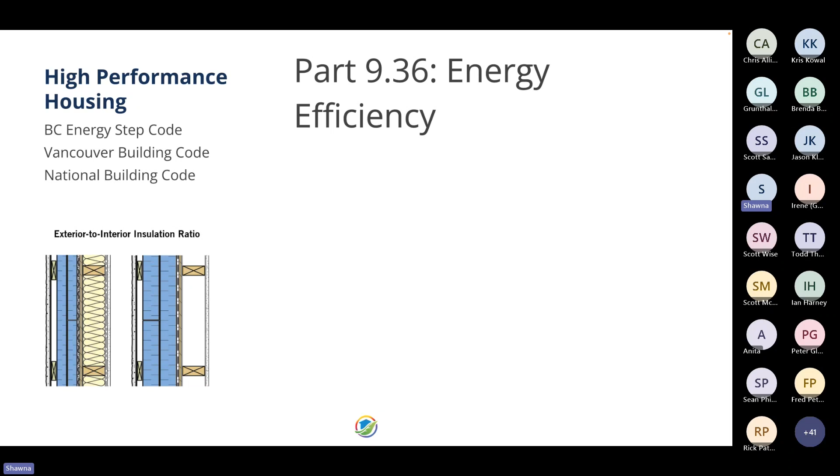Coming up in the 2025 code are retrofits. This means Part 10, alterations to existing buildings, is focusing on energy conservation for retrofits. So this is huge for all of those builders or contractors that you have not seen focus on high performance. They're now going to have to actually work within that realm, and it's going to be new to them. So why do we care so much? How does it affect you?

Because we're moving into places where building science is the key. Part 9.36, everything to do with energy efficiency and energy conservation, is based in building science. Building science looks at the house as a system, how all of the parts of the house or the building interact with each other: the envelope, the occupants, the outside environment, mechanicals. It's all connected. It's all dynamic because we have moisture changing, we have temperature changes, we have wind.

We want to make sure that we can control all of those things so that the house is comfortable and reduces energy use for the occupants. And then bonus points, when we reduce energy, we also typically reduce carbon loading, so we're doing something for the environment as well. So the key primary factors for building science are based on controlling airflows, heat transfer, and moisture flows.

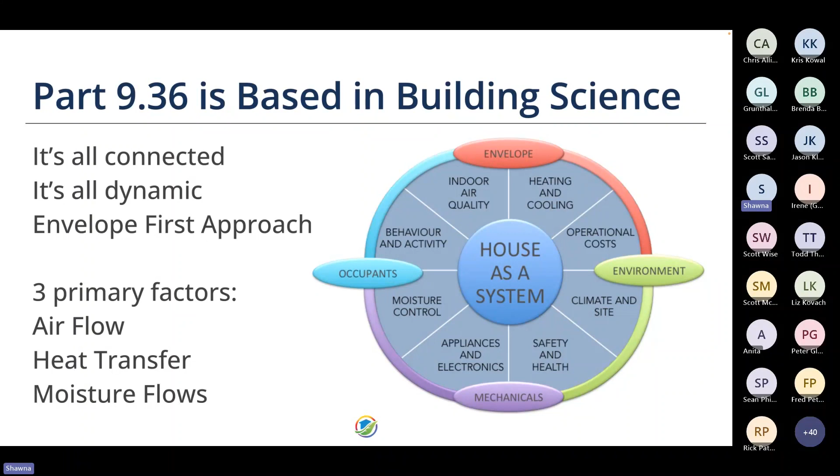When you get into these high performance buildings, the key to them, because it's the most complex piece, is a high performance wall. Now, everything else has requirements within the building code for insulation levels, for air tightness, for the different control layers, but the walls are the places where there's the most variation. So typically we see this kind of a wall, which is a double stud wall.

It could be 2x4 stud walls built one inside the other, with one of them being the bearing wall, or they could be a 2x6 on the outside as a bearing wall and a 2x4 on the inside. They can be connected by one plate, like a 2x8 or 2x4 sill plate. They could have separate sill plates. They can even be manufactured like floor joists. They can be floor joists that are actually stood up in a vertical position as well.

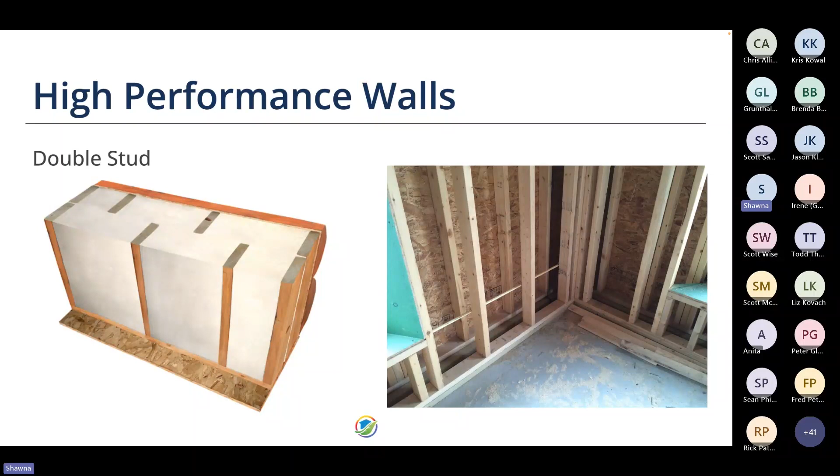There's a lot of variations in this one in terms of how builders like to do the assembly. Mainly, they like to do this one because there's no special training and no special materials. You don't have to do a lot more than put up two walls, one inside the other. So crews can stand them up pretty quickly. The other wall, and you'll see this a lot as well, is a split insulation wall where you have rigid or semi-rigid insulation on the exterior of the sheathing.

And you have typically a very inexpensive batt insulation to the interior in the stud cavity. And these vary widely. You can have rock wool, fiberglass, blown cellulose on the interior. You could have semi-rigid mineral wool on the exterior. You could have a type 1, type 2, or type 4 insulation, polyisocyanurate, or an insulated sheathing product. Wide range here too.

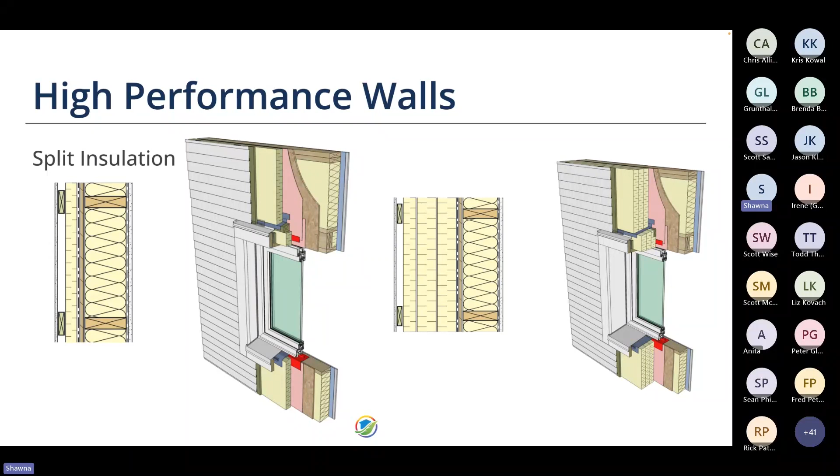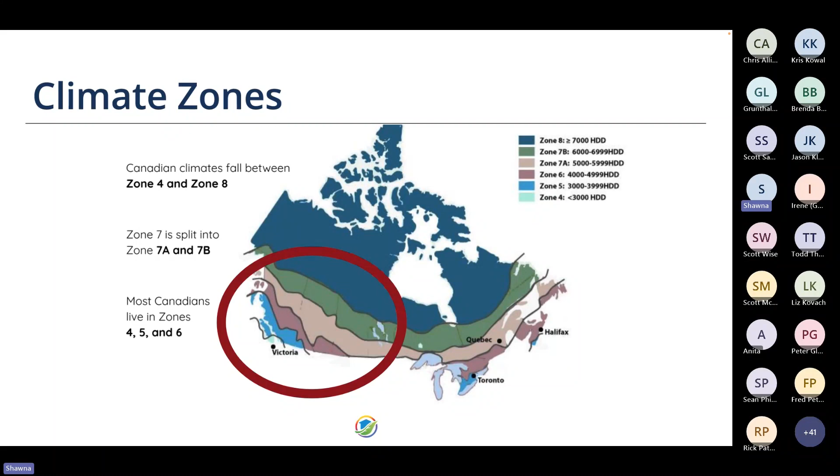What we also need to know, once you get past all the different pieces and bits of the high performance walls, is what suits which climate zone. So most Canadians live in zones 4, 5, and 6. When you're in Western Canada, if you're in BC, you could be in the range of between 4 and 8. But once you move past that first border, you're moving into colder mid-continent climate zones. So by the time you hit Saskatchewan and Manitoba, now you're actually in zone 7A, 7B, and 8. And those are very different approaches because of the extreme temperatures.

Now, most of the population lives in 4, 5, and 6, and the bottom part of 7A. There's a broad swath of housing that we can work with, and some really solid building science right across the country has been brought into place. The top part of 7A, and then 7B and 8, we really need to focus on more detailing and take a different approach to the products that we're using for insulation.

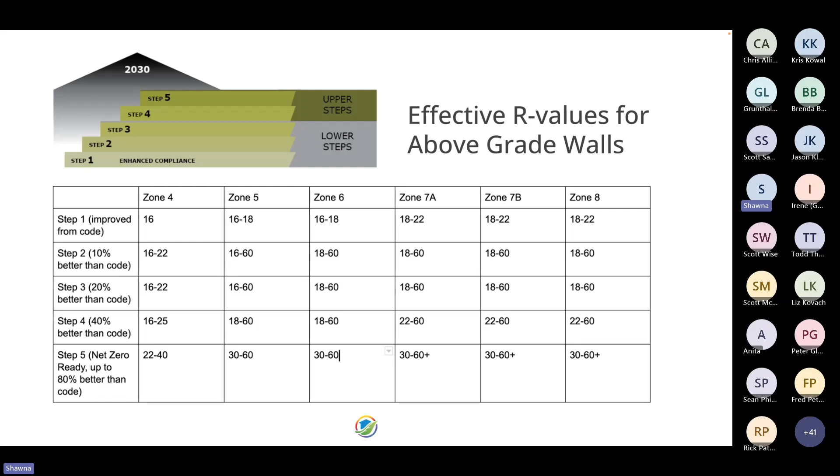So here's a quick little chart showing you the effective R values for above grade walls as per the BC Building Code, which is reflected in the National Tiered Code. So they've been harmonized with an agreement that went right across the provinces, I think 2022. Anyway, that's irrelevant for this. But you can see that there's quite a range of effective R values for above grade walls as you move through not only the climate zones, but as you move from step 1, which is slightly improved from the 2010 code, through step 2, 3, 4, and 5. So how you deal with these ranges of climate zone and which part of the step code or the tiered code you're working with is key.

Oh, there we go. Oh, no, I missed one.

There we go. So on top of effective R value, which is a weighted calculation that takes into consideration the fact that you have differing insulation or thermal resistance between areas of a wall. For example, the studs are wood. Wood has R1 per inch. So if you've got a 2x6, you've got R5.5 or so. And in that cavity, you could have up to R24 batt insulation. If you went with something else, like a closed cell foam, you'd have more insulation there. And so effective R value basically says, here's the percentage of stud, and here's the percentage of stud cavity, and gives you a weighted solution. So that's what effective R value is.

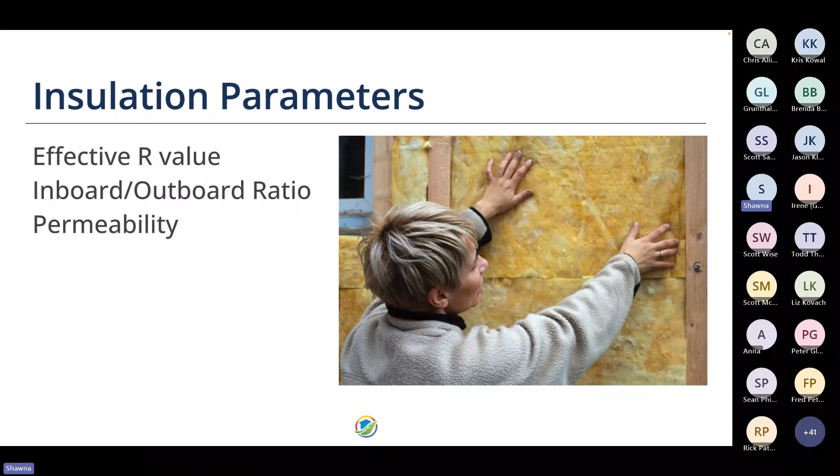On top of that, you also need to know what the inboard and outboard ratio is for the cavity fill and the outboard insulation. I'll get into why in a second. And then you also need to know about the permeability of the whole assembly. So those are three things that are all in the building code, and we're going to have to be very clear about what we're doing when we do the calculus between my climate zone, the piece of the step code or tiered code that I'm working in, and the materials that the builder or renovator has put into their order.

So our biggest threat, and it's probably no surprise to anybody who sells lumber, is that mold loves wood, moisture is the source of mold, and we get occupant health issues on top of rot and structural issues when we have moisture and mold problems in a house. So the ideal conditions for mold to grow are very much like the interior of a house, anywhere between 18 to 24 degrees, moisture content in the wood at 20, and relative humidity in the house of 50, 70 being when mold really starts to generate. So those are not uncommon conditions for the interior of a house.

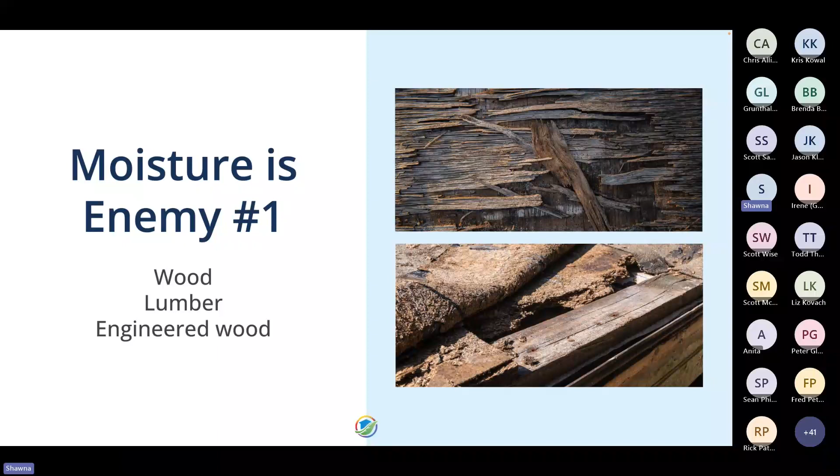And we know that moisture is enemy number one for wood. Solid wood and lumber take a long time to decay and perish. But the more you get into engineered wood products, the faster they delaminate and decay when exposed to moisture and temperature problems or extremes.

And then we have cellulose-based products. So the whole house is basically built out of wood and cellulose. And when we have paper-faced drywall, we end up with mold when we have those high humidity levels. And this is often the time where we go, there's a big problem here, and all we're seeing is the superficial piece, but there could be rot and structural issues behind.

So we want to make sure that whatever we're doing in a new building that we're taking to high performance, but especially in an older existing building that we're going to move to a deep energy retrofit, that we are not creating more problems in the wall system than already exist or could exist in the case of a new building.

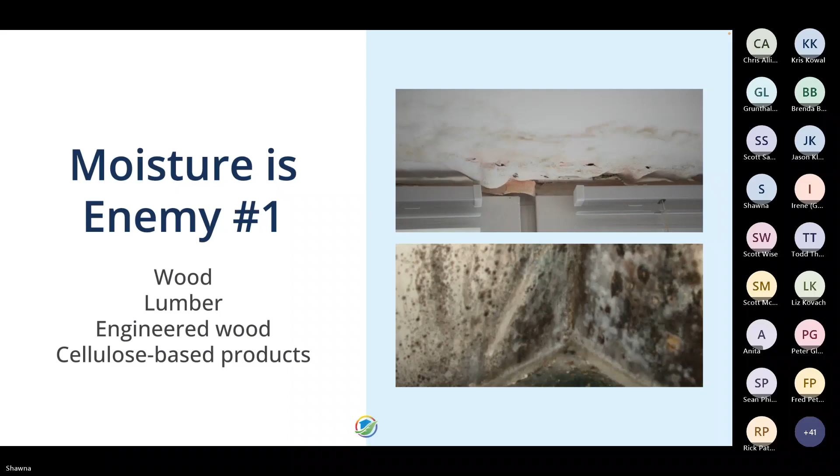So that's all about control layers. And control layers are the outcome of building science. The role they play is to counteract air, moisture and heat flows. So we have an air barrier, we have a vapor barrier or vapor diffusion retarder. We need to create a thermal envelope. So we need to have something that's going to give us the thermal resistance of the insulation. And then we also need weather protection.

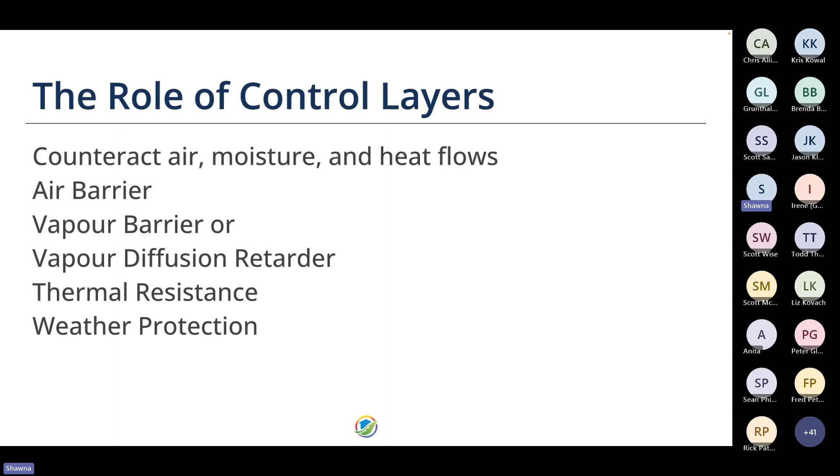So when we're talking about walls, we're talking about a whole system. And this also is part and parcel of foundation and ceiling/roof components, but the whole house has to be dealt with. But I'm focusing on walls right now because they are the biggest puzzle piece, because that's where occupants are most affected by the assembly.

So it's either they're comfortable because the ambient temperature of the inside of the wall is closer to their temperature. Windows are high performance, so they're not losing as much heat to the window from their own bodies. And then also, of course, the energy efficiency piece of it.

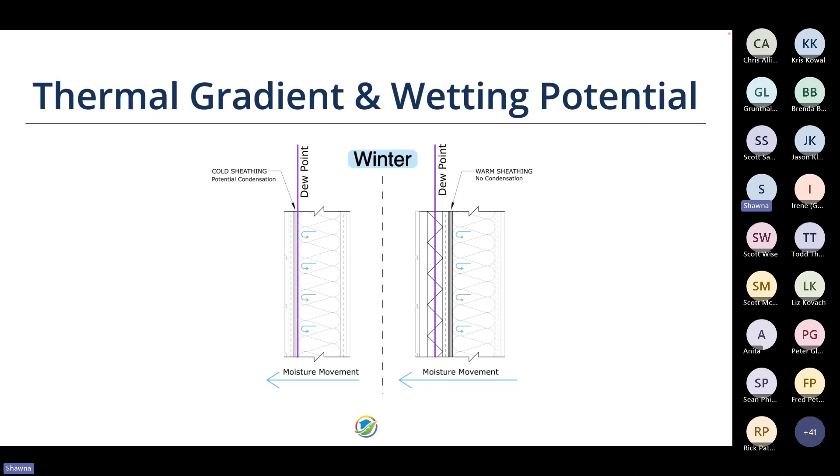So we need to be able to create these assemblies looking at what the thermal gradient and wetting potential of the wall is. We have this thing called the dew point, which is where the temperature of the air that is in the wall starts to get lower as it reaches the outside temperature. And we want to make sure that that dew point is not on the back of a cold sheathing, because it's going to condense out and cause moisture to be trapped inside the wall cavity. We want it to be outside, either on the outside face of the sheathing or on the outside face of that split insulation, depending on the wall system that I showed you earlier.

So the whole assembly has to have the drying potential baked into the assembly. So it can dry to the interior or the exterior or both. And again, that's going to depend on where you are and what the builder has chosen for their assemblies, or what the renovator is putting to the exterior, or whatever they're doing to the building envelope.

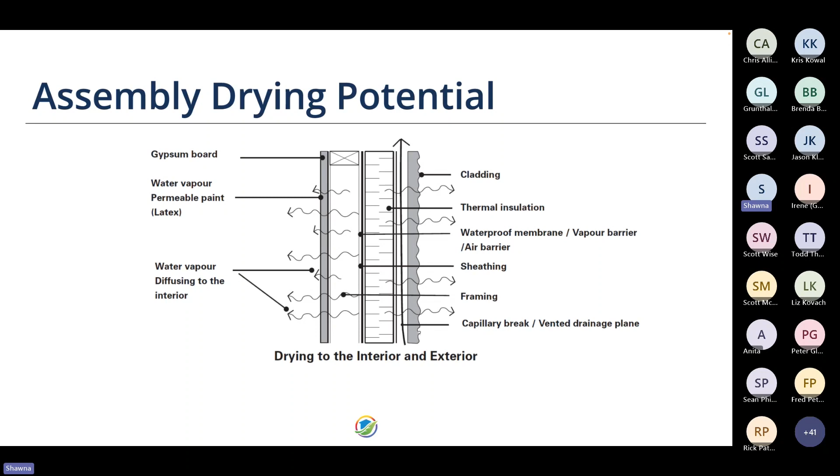So we have an air barrier. Is it interior or exterior? The vapor diffusion retarder, where does it go? What does it solve? Insulation, what's your best choice for above grade, below grade, the interior, the exterior? Do you need a permeable material? Is impermeable the way to go? So there's a lot of decisions to be made.

And if your client is coming to you and has asked for a material, and you don't have that in stock, or it's not something you carry, you're going to have to be able to provide them with a reasonable substitute that is going to match the characteristics of the product that they have spec'd. So material choices, to wrap up, are key to the performance success as well as code compliance. So performance success means that we can keep the house comfortable, but we're also not baking in unintended consequences of trapping moisture or creating other issues in the house that are going to cause some comfort problems.

So as technical sales folks, who do you serve? You serve the builders and the renovators, but more importantly, who's coming into the store to talk to you about the materials? Is it the builder or the renovator, or is it their contractors? And out of that whole chain of people who are involved in the process of building, who's the person who understands the code and the building science? And who are they relying on for the materials choices and substitutions? It's going to have to be partially up to you folks who are doing the selling.